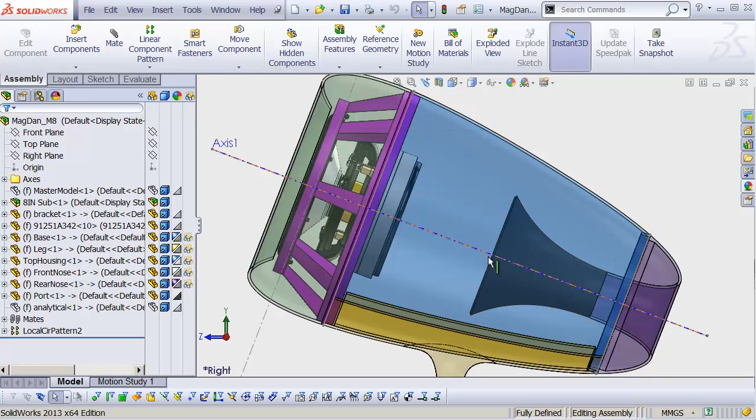You could imagine going into lots and lots of detail here, especially if you're an engineer, looking at this and saying that's a nice start, but clearly there's a long way to go working out the mechanical fastening features between these parts, plus molding issues we haven't worked through. What I'm trying to show is that this process is gradual refinement. I put out what I know, then gradually add things as I learn and make decisions. Over time you may reach a point where you want to start over from scratch after learning from the modeling process. But at this point I think we've learned what we need from this model, and I'm ready to move on. I want to add some fun details before we finish up.

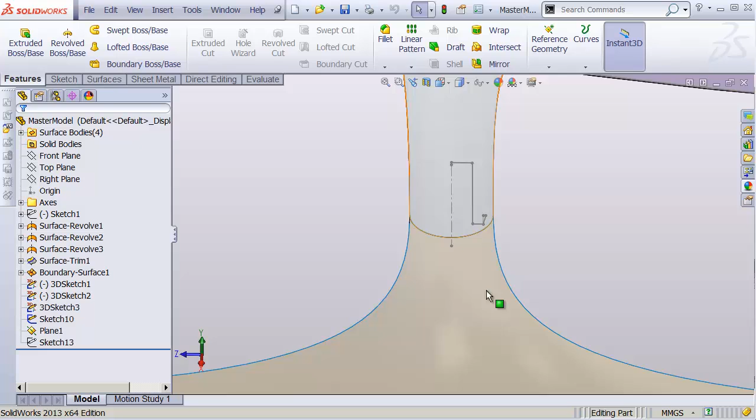So first, let's open up our master model. One thing I want to add is the cables that can come through this and out the back, just a fun detail. On the top plane, at the intersection between the base and the leg, I'm going to create a sketch, grab my circle tool, and create a circle right in the middle — let's call that 0.25 inches, a quarter inch in diameter, just big enough to bring a cable through. I'll exit that sketch.

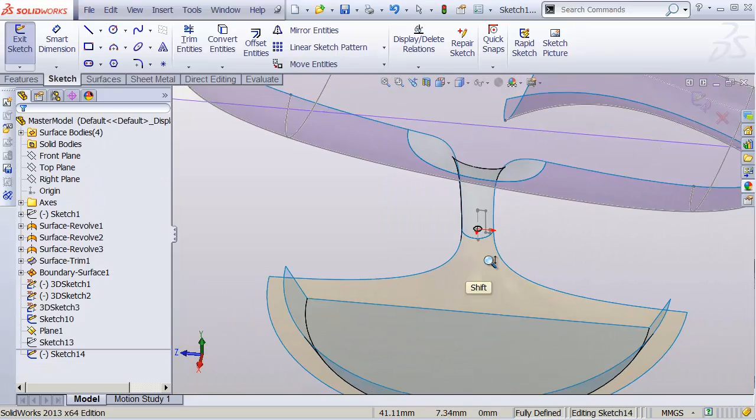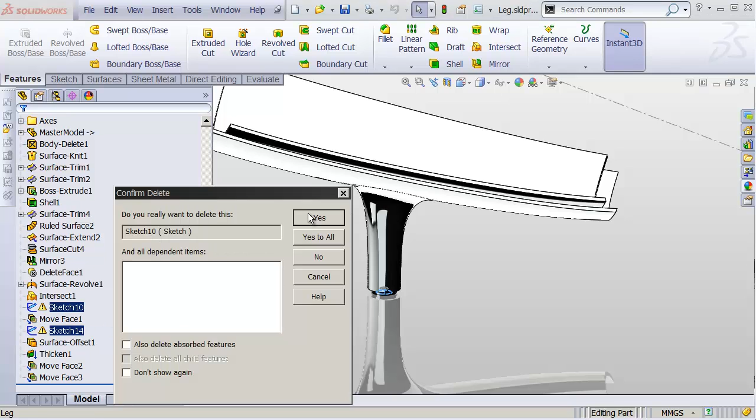That's all I need here, so let's close that back up and save it, then open up this next part in its own window. Here we are in our leg component, and there are a couple of things we want to change before going further. There may be a couple of extra sketches here that we don't need for the moment — I'll delete those, I don't know where those came from. Now I'll go to my Direct Editing tab.

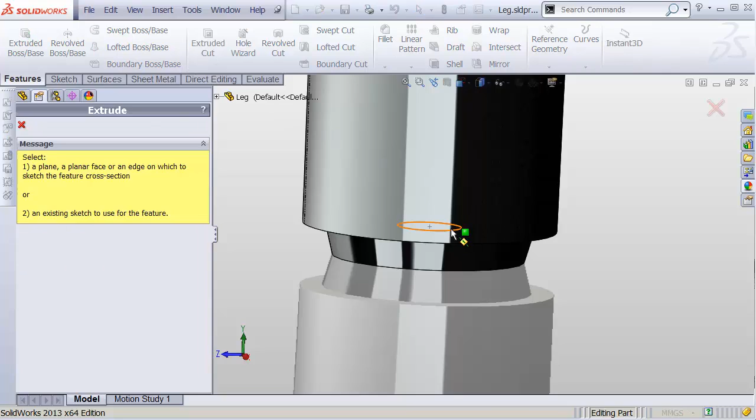I'm going to combine this piece with that piece, since we never merged those together — we just put them in place but didn't combine them. So let's add those together. Now we have one chunk of metal, and we want to blow a hole through it. Let's go to Features, Extrude Cut, and use that newly imported circle sketch from the master model, go through all in the other direction, and hit OK. We now have a hole that goes straight through.

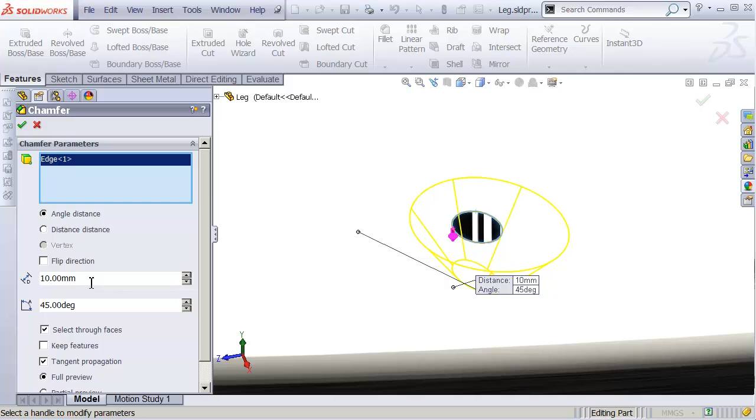We can use that to thread our cables through. Just so we don't saw those cables in half, let's come in here with a chamfer tool and hit this with a quick chamfer — we'll call this a 45-degree, 4mm chamfer. That looks fine, nice, clean, and easy. Close that up and go back to our main assembly.

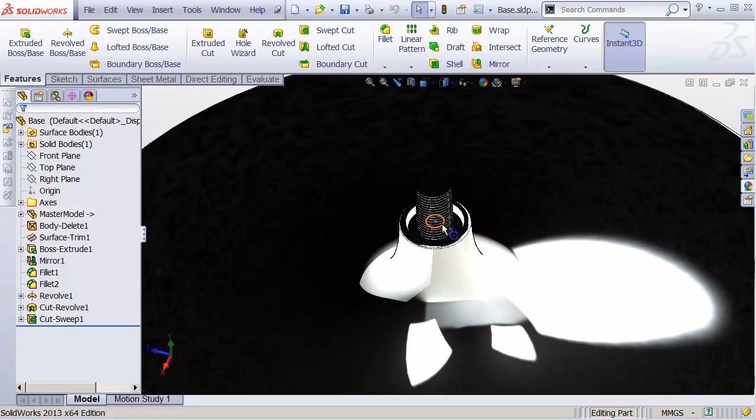Now we have a place for the cables to come down, and we need them to be able to come out the base. So let's open that base — once again that sketch will have been imported for us, and I believe this is all one solid body already. So let's select that sketch and do an extruded cut, say through all on this one, and in direction 2 we need to go through all as well. Hit OK, and that ought to do it.

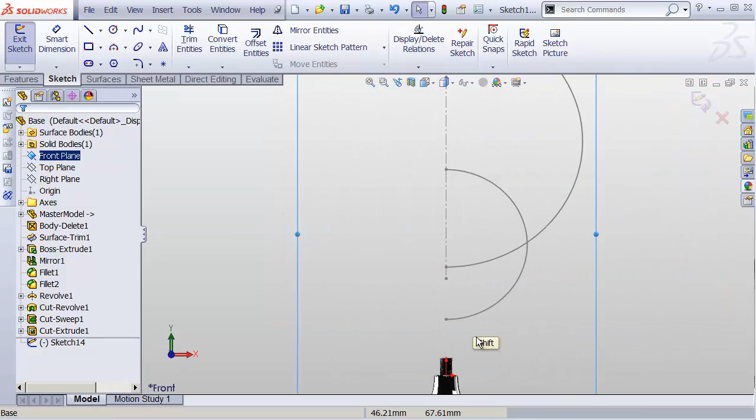One other thing we need is for the cable to exit the back of this piece. So let's go to the front plane, create a sketch, and look normal to that plane so it's easy to see. Then I'll draw a slot — grab my slot tool and do a slot straight up like that. Let's make sure the diameter is a quarter inch so it matches the other one.

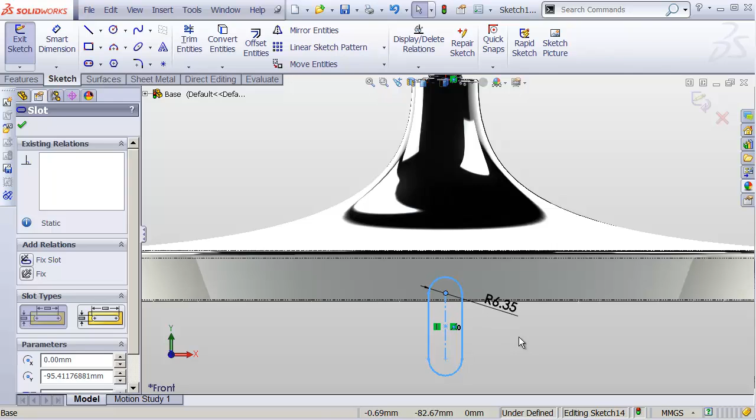I'll make sure that comes up a certain amount — I'm just going to eyeball it because I don't know the exact dimension. A lot of times when I'm working, if I don't know a dimension, I don't add one. That will remind me later that I didn't really know how tall this should be, so it's not fixed in any particular place. If I add a dimension, I'll assume there was a reason I added it. So let's do an extrude cut and blow this out the back. The back is this direction toward my left, so I'll say through all in that direction and hit OK — that should work pretty well.

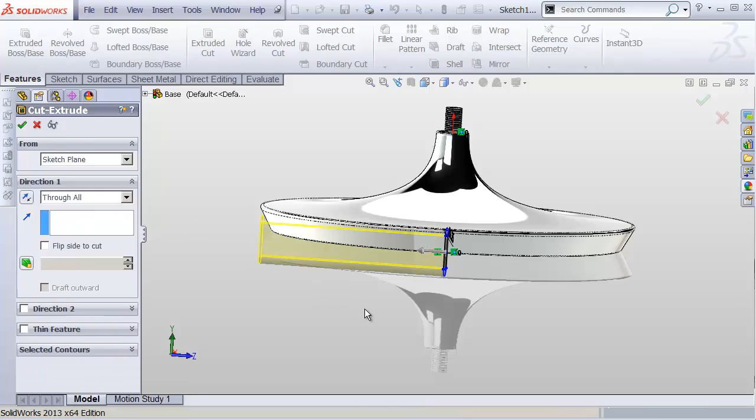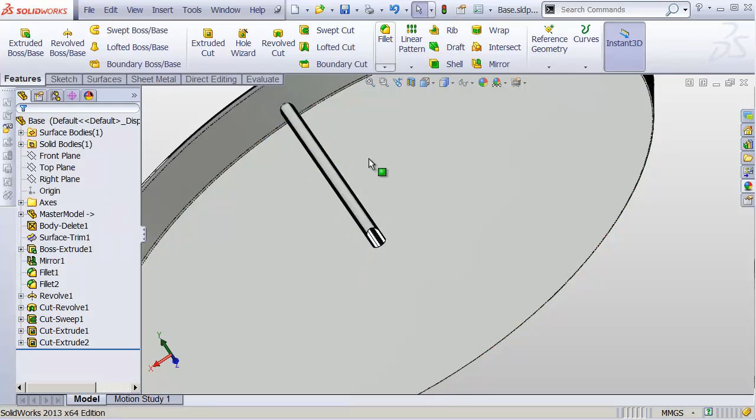So now we have a hole that comes straight through. It looks like I accidentally made this too wide, right? So let's change that original sketch radius — right now it's set to a radius of 6.35, and I really want that to be the diameter, so I'm going to set that to over 2. We divide that in half and click the update button right up at the top. Much better — that is exactly what we needed, much more better now.

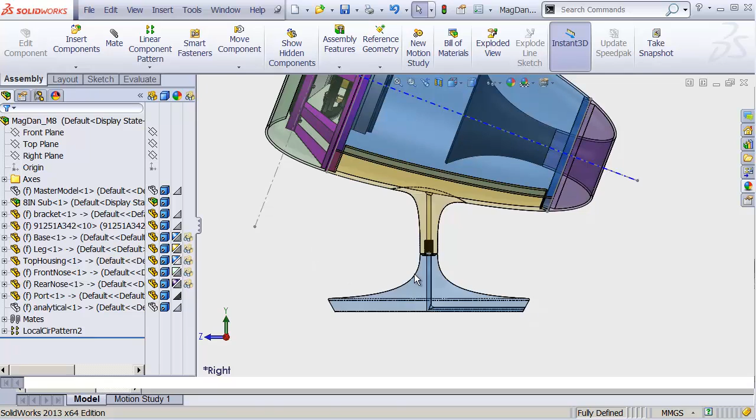Also this edge, another knife edge that might cut our cable, I'm going to round that off — let's give it a 5mm radius right in there. That should be all we need on that. Let's close this up, go back to our assembly, and now we have a cable path coming straight down the legs, straight down the base, and out the back.

But there's another detail I want to add, and that's a little foot that we can add to the bottom of this after we've run the cable through. Let's add that in the next video.